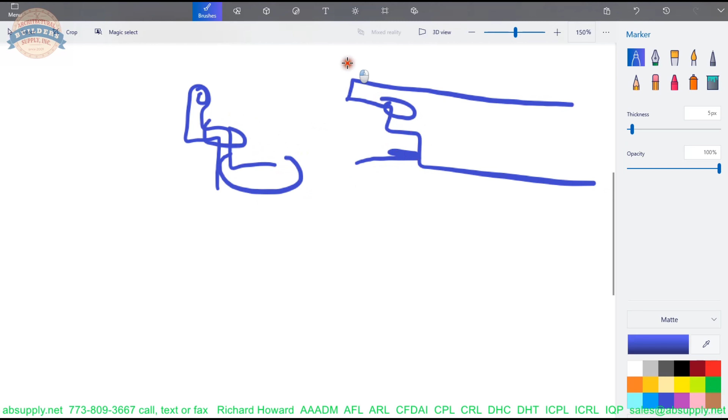So your hinge looks like this. Okay, so your door is going to end up looking not unlike this. This is going to sit here. This is going to sit here. Okay, that hinge is going to come here. Now your jamb...

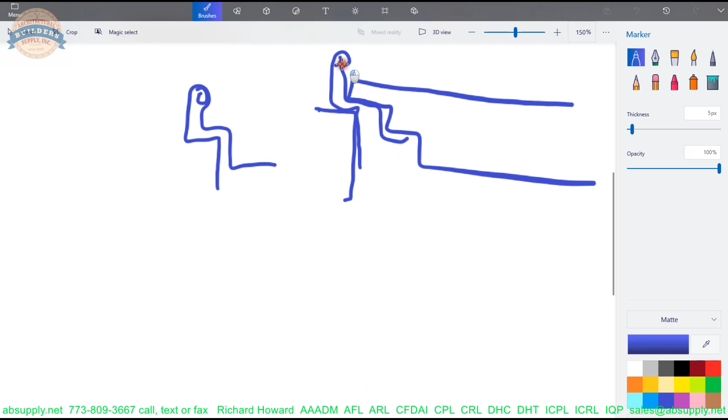So there you go. A poor drawing of what we're working on, but that's the edge of what your door is going to look like. And what they're saying is that the dimension from here to here is 3/8. The dimension from here to here is 3/8, and that's what you have to measure.

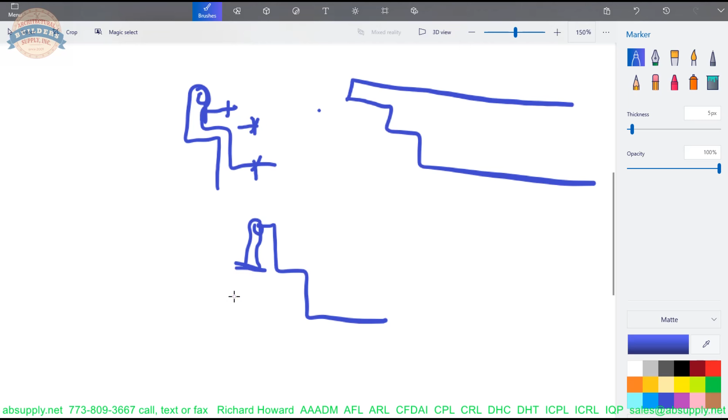Now, recently, and quite coincidentally, I've had a couple of clients with overlay inset hinges. I think one was quarter inch overlay and 5/8 inset. The other may have been the same type of hinge, but not a partial wrap. It's just a hinge that is surface mounted. And what both of these clients have discovered, because they're working on projects where the cabinetry was built in the 1950s or 60s, is that the modern replacements are not completely accurate.

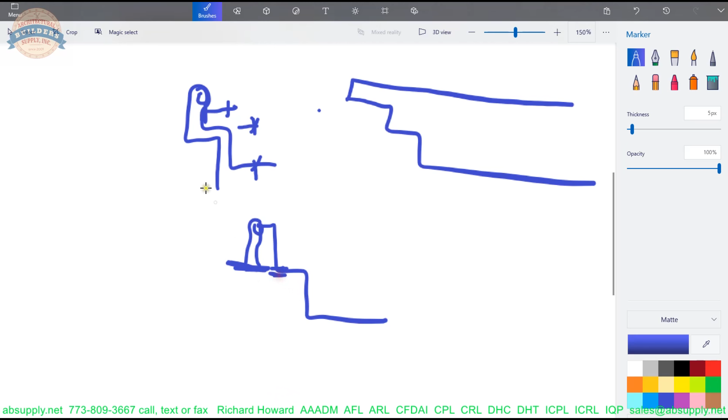And what I'm referring to is the dimension here. They were both surface mount, and where this plane of where the hinge mounts to is either shy of this plane or slightly below this plane, and it was causing trouble for the client in the fact that the plane was higher, thus allowing the door to sit into the opening further, causing a little bit of rub.

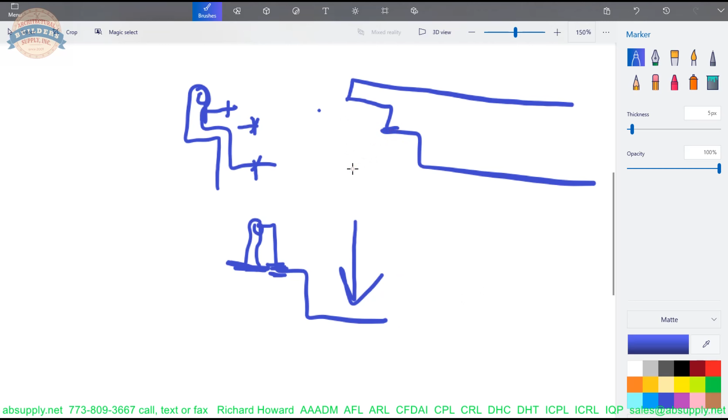It's interesting that in all the decades of selling cabinet hardware, in 2 weeks I've had the same problem with mid-century cabinet hardware. But anyway, if you're replacing hinges from the 1950s or 60s, expect you might have to do more than just swap out hinges. Possibly relieving part of the door preparation is what's going to be necessary. Okay, we've discussed what the overlay and what the inset is. Now we can look at it a little bit further.

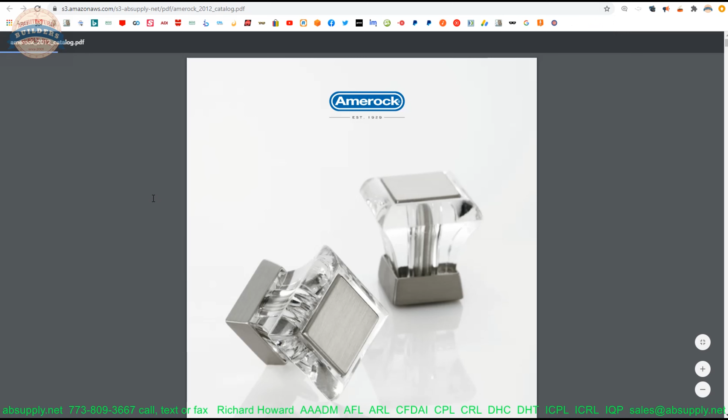The link here to the manufacturer's page will allow you to review not only all of the Amerock products that we sell, but also a link to the manufacturer's website, as well as a link to the current product catalog. But the one I like is the 2012 product catalog, because it's going to show us a variety of different hinge types. And the reason I draw your attention to this is because there is likely just a failure of general understanding of the different terms.

And when we get down to about the 90th page or so, we're going to start seeing hinges, and here they are. Yeah, about the 88th page of the document. As you scroll through, you're going to see where you have different terms defined. Here's partial wrap. Here's full wrap. Just study what the two hinges look like. The full wrap has a bend back here. The partial wrap does not.

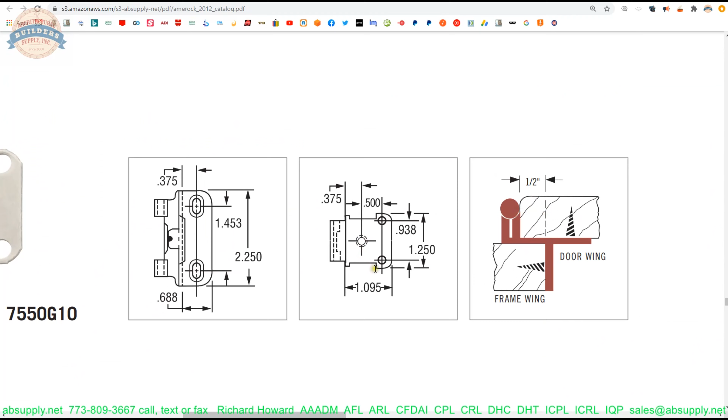And as you study through this catalog, you're going to see how these hinges look in cross view, and they define the dimensions. So this hinge is a partial wrap. We know that it refers to this leg of the hinge, but we know that it's an overlay as well, and they define for us that overlay: how much the door overlays the face of the opening. And as you scroll through, you'll find additional references where you can further your understanding of what these terms are.

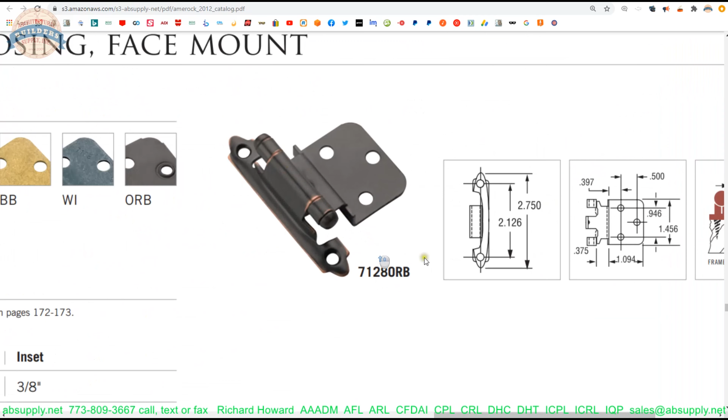Here is an overlay inset hinge. This is the same hinge we have, except it's surface mounted, or what they call face mount. 3/8 overlay, 3/8 inset, face mount. So we've got a 7565, and if I search this document, we will certainly find the 7565, and here it is in cross section, right there. Okay. Let's wrap up this video on camera.

In conclusion, the name Amerock is quite synonymous with cabinet hardware, and you'll see from their product catalog that they get into organizational material as well. Different finishes this hinge is available in. This is the burnished brass. Let's take a look and see what other finishes are available in this item. I know that 2012 catalog listed 3 other finishes.

And as I look at the other finishes, it tells me that we're looking at a satin nickel, which is a G10 finish. We're looking at an ORB, which would be oil rubbed bronze. A BB, of course, burnished brass. And that appears to be the 3 finishes that are available in this item at this time.